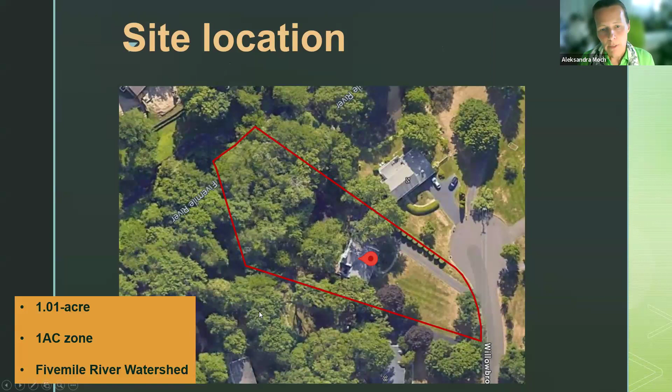Here's the view of the property. It is a 1 acre property in a 1-AC zone and within the 5 Mile River watershed. As you can see, the backyard is mostly wooded with large old trees. We have 5 Mile River, which follows the property line, and then another river, the Willowbrook, which runs through the center of the yard. Wetland watercourses at the site: 5 Mile River mentioned before, and a man-made pond, and this is the Willowbrook, which comes through the pond and exits the property. In green, the associated wetland around the watercourses was delineated by Aleksandra Moch, myself.

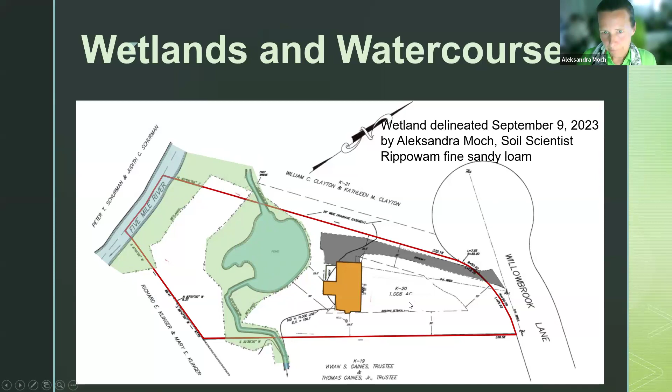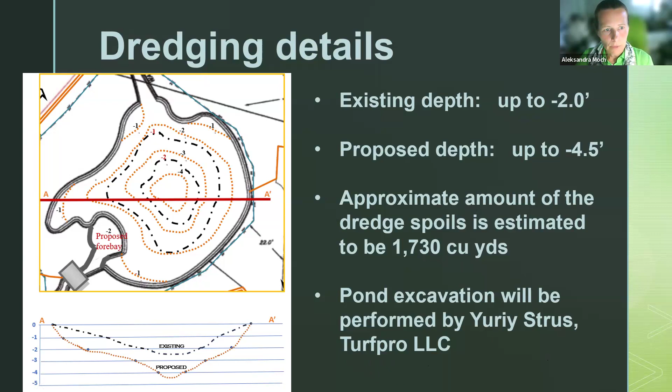As for the methods of dredging, first of all this is a maintenance dredge, so we are going to stay within the perimeter of the pond. We're not going to be enlarging the pond or changing the shape. We're just going to be focusing on the depth.

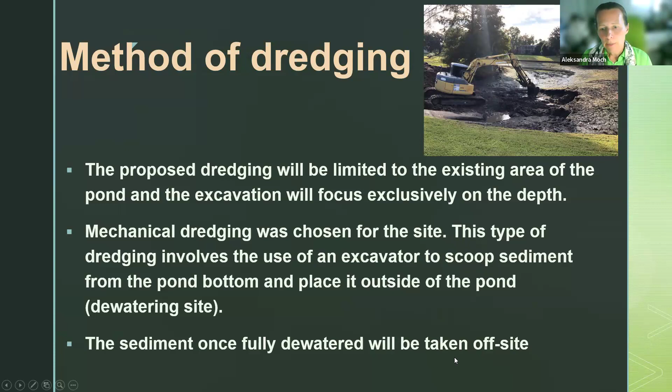If we go back to the survey, we don't have any place to store the material, so we have to take it out. This area is within the flood zone. This area is the only level area and the only actual recreational yard for the property, and this is all septic, so we can't use this area. So the sediment is going to be taken out.

The benefits of dredging: removes nutrients and heavy sediment, increases stormwater capacity, improves aesthetics, restores aquatic habitat, and resets the lifespan of the pond.

The pond usually starts young and then starts aging. When you excavate or dredge the pond, you have no vegetation around, and the water is not full of nutrients. Gradually the vegetation starts populating the edges, and that's how the process starts of organic debris settling at the bottom of the pond. The pond starts shallow, there is excess nutrients, and the pond goes eutrophic. At one point it needs to be dredged again to maintain the habitat.

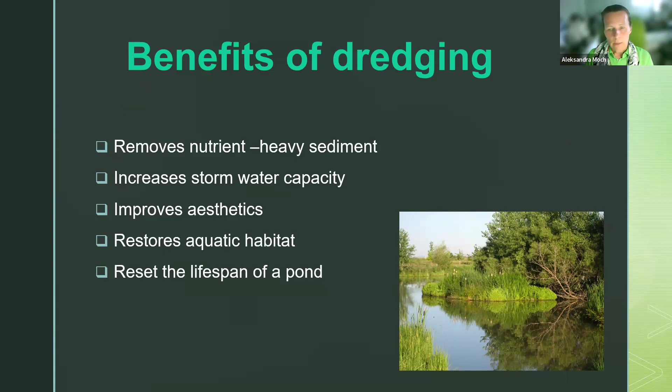And this is my presentation. I'm here to answer any questions.

Anyone with any questions? Angela Jameson, for the record. Thank you for that presentation.

So how long do you think the project will take, and what is the biggest challenge with a project like this? Well, dewatering is going to be the biggest challenge. How long it's going to take -- it's going to probably take a little bit longer, because it's not just excavation and dewatering.

We'll have to excavate, dewater, and spread the sediment somewhere on the property as we go. As soon as the sediment is dry -- it all depends how much rain we're going to have -- we'll be able to take it out. It is quite a lot of sediment, so there will probably be a week to truck this out of the site. I'm not sure how long the dredging will take, but I think it will probably be less than a month.

Thank you. And where exactly will you put the sediment to dry before you remove it from the property? So we have two areas. Here's one, which is going to be surrounded by double silt fence and hay bales, and here's basin number 2.

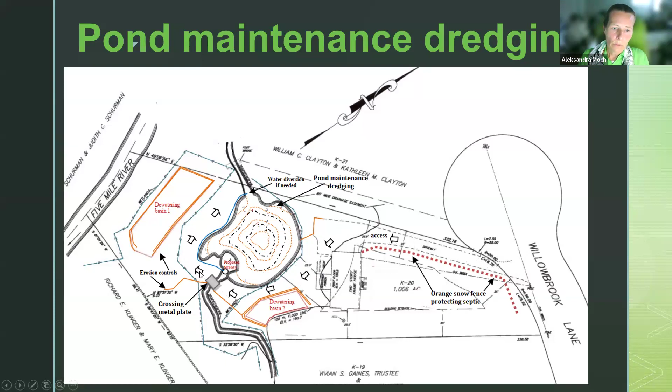Thank you. Do you have any special recommendations or anything?

I contemplated all of the applications for tonight, and honestly, I couldn't think of any special conditions that would be adding any benefit to the actual application. I think Alexandra has covered the proposal very well in a lot of detail.

So if you have any, please let me know. I did want to introduce the property owner, who is here. Mr. Driscoll is in the front row, so he is in attendance this evening. So if you had any questions for Mr. Driscoll. Do you have anything you'd like to say, Mr. Driscoll?

So I honestly couldn't think of any special conditions that would apply. Can't think of anything. Anybody?

All right, can I hear a motion without special conditions? Sandy Redden for the record. I'll make a motion to approve IW 24-9, 50 Willowbrook Lane, with no special conditions.

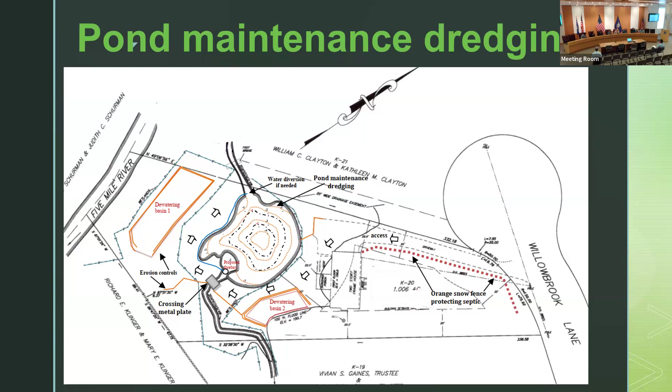I second the motion. All those in favor? Aye. All those deny or not approve? There aren't any, so motion's carried. Thank you very much. Thank you.

Let's have a dry summer so you can dredge away. Keep our fingers crossed. Thank you, Alexandra. Thank you.

All right, moving on to item 8, application number IW 2413-51. Remove invasive plants and install native plants. Activities proposed in wetlands and upland review area. Agent Michael Boyce, landscape architect.

Yep, he's just getting his presentation. Oh, did it? Okay, voila, there you go. Turn your mic on just for your presentation so that you can hear. Everybody hear me? Okay, there we go.

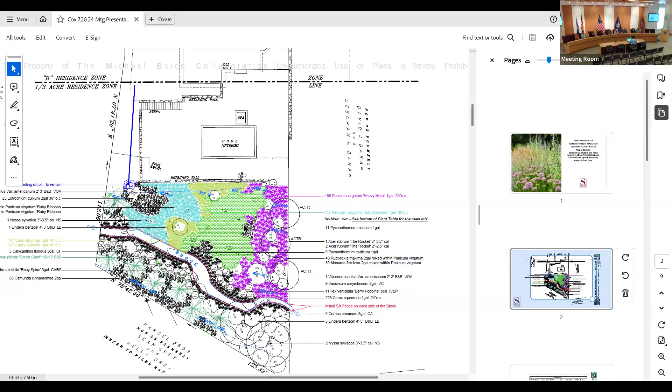It has a beautiful yellow flower on it, and it's important for attracting 3 different types of butterflies. And it's a plant that will reseed. The reason why it's mixed in with some of the fescue is the reseeding will be kept in check a little bit by the fescue.

And the sort of light lime green, a variety of carex, 2 different varieties of carex. Then we have a different variety of panicum in this area. We have Joe Pye weed. We have a large Viburnum americanum here.

We are proposing to add 6 trees. 2 of the trees were recently added. The neighbor at 61 Harrison requested 2 trees, so we added 2 more of the Acer rubrum, the Rocket. We chose the Rocket in particular because it's a fairly narrow tree as far as maples go. It'll probably grow about 15 to 18 feet wide, and probably about 35 feet tall at maturity, so it'll allow a fair amount of sunlight through to the plants underneath.

And there are 3 Nyssa sylvatica, one here, and one in this area. And then the pond is literally edged by 223 carex, Cornus amomum, and Clethra alnifolia, and mixed in among these is cinnamon fern.

So the idea here is that, you know, if you think about partridge pea, cinnamon fern, those plants, even Joe Pye weed, they're pretty good at self-sowing, reseeding, and colonizing. So that's something we want to see happen.

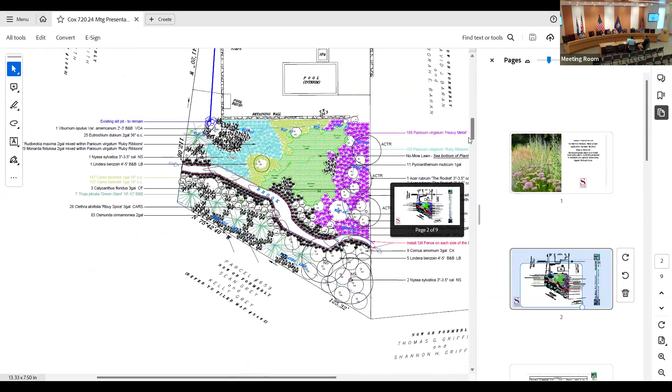...the species he's talking about as far as the landscape to be implemented into the rear yard. I think the really important thing that Michael and Mr. Cox are trying to accomplish is out-competing invasives, and that's the challenge for this location because it's not been maintained, just ignored for a number of years. Now we actually have a mitigation plan he's undertaking, all native plants that seem appropriate for the site, with removal of invasives beforehand.

I was going to ask a similar question, go ahead. Just in terms of what technique you can use for removing the invasives, are we safe in assuming you're not going to use any herbicides?

No herbicides. The challenge is, I didn't see any stilt grass—I haven't been there in a little while, so there might be some there—and there might be Japanese mugwort. Those are pretty easy to pull by hand. If you have some time, you can actually pull Japanese mugwort out and it'll come out pretty easily.

Stilt grasses, just trying to get that pulled out before it reseeds, because every plant produces something like 1,000 seeds.

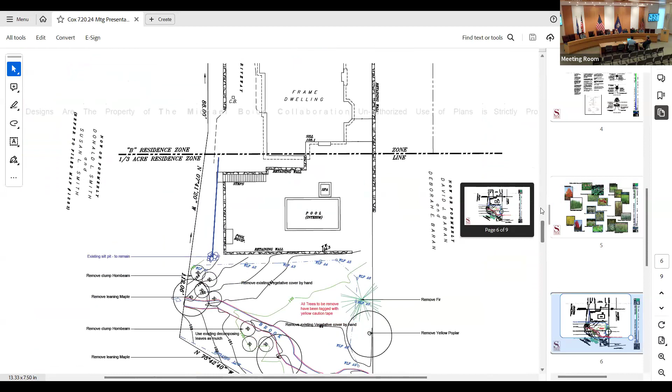No? Can we hear a motion? What's the special condition? So I move approval of the application with the special condition as outlined by Kathleen Holland. Can I hear a second? Beth Sanford, I will second it. All those in favor? Aye. All those opposed?

Motion's carried. Thank you very much. Thank you very much. We'll be in touch. It's work, can't wait to see this. Yeah, me neither. Thank you very much.

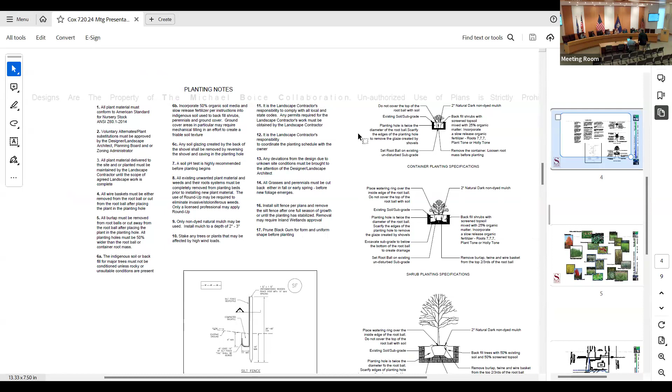The next item, application number 2414, 677 South Avenue, agent Tiger Man. Before we get started, I'd like to discuss the possibility, and what do you think, the commission of a public hearing? I'm sorry, sorry, I don't mean to interrupt, but I will be — this is Commissioner Brunelli for the record.

I will be recusing myself from application number IW 24-14 as I am an adjacent property owner and have a conflict of interest. All right, thank you. I'd like to discuss the possibility of having a public hearing instead of

just kind of a one-on-one here. And the reason — I'll go through the guidelines here. There's three guidelines, but the reason I'm suggesting it is because normally for major establishments here in New Canaan, we do a public hearing, especially for Waveny Park. Good reason to, but, you know, I'd like to decide today if that's what we're gonna do, and if we do it, then we'll plan it for the next meeting. We can.

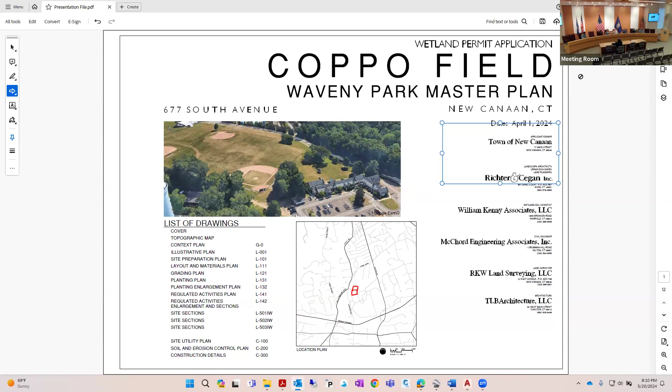Anything else we need to do, or we'll just talk tomorrow? Okay, talk later or tomorrow. Perfect. All right, thank you, Tiger. Thank you, Tiger.

Agent report, administrative actions, permit number 2416. Any comments you may want to make? No, just three administrative permits were issued over the last month, and some small projects—pretty small stuff. But if anyone has any questions, happy to answer.